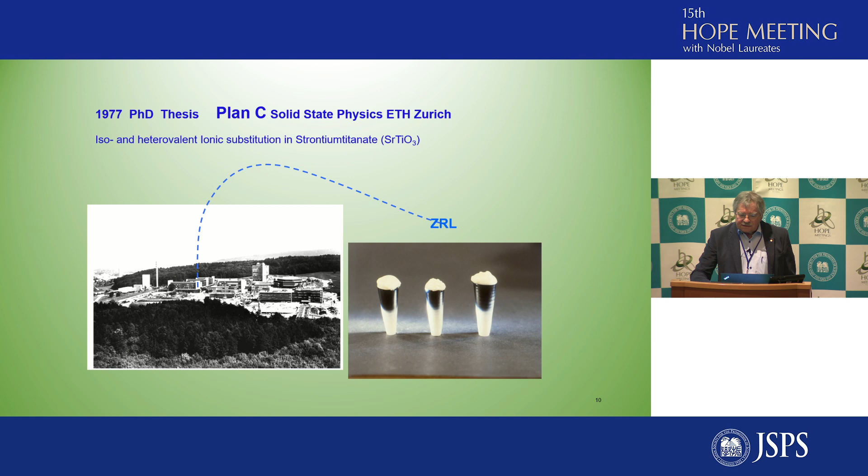Some colleague at the IBM lab, Gerd Binnig, was interested in superconductivity in some kind of organic compound. He had worked on it during his PhD thesis. And when he joined the Zurich lab, he had the idea: can we do some modification of the carrier density of the reduced strontium titanate? Can we do some niobium doping?

So I said, if nature allows so, we will do it and you will get some new crystals. So within 3 days, I was able to take a crystal and send it to Gerd Binnig, and he was very enthusiastic about the short time between his desire and the wish he got fulfilled.

So niobium-doped crystals were superconducting, at higher temperatures. So that was my first encounter with superconductivity.

With niobium doping, the transition temperature could be increased from 0.3 Kelvin to 1.2 Kelvin. That's 300%. Gerd was very enthusiastic about it and said if we could further increase the carrier density, would it go even higher, approaching room temperature? Well, we tried, but as was observed later on, also for the cuprates, increasing the carrier density led to a decrease in the TC and the vanishing of the superconductivity finally. So he lost his interest.

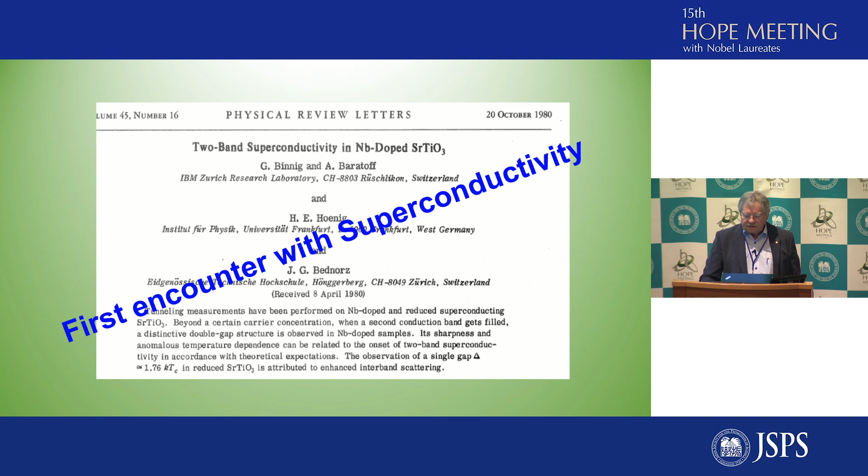I lost the chance to have a new project and continued my PhD, while Gerd, with his senior colleague Heini Rohrer, started to work on scanning tunneling microscopy. This was a good decision. They were able to get in touch with atoms and molecules as addressable individuals, and they were able to control and work with an accuracy down to the picometer size. And finally, this brought them the Nobel Prize for Physics in 1986.

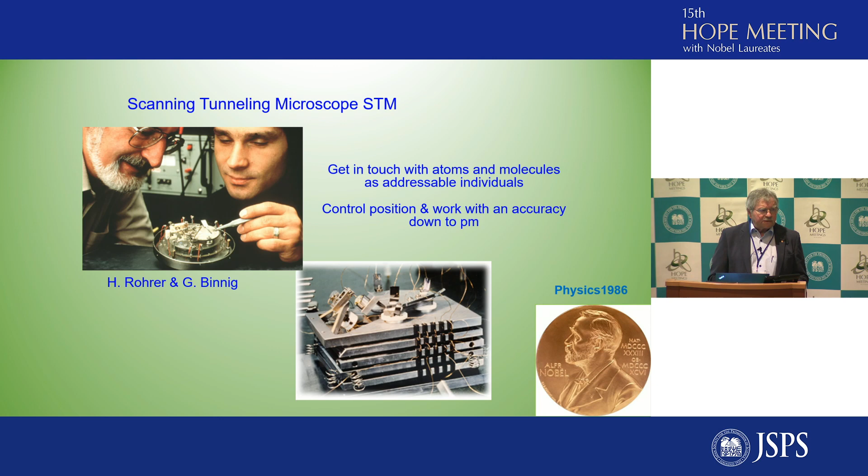So I was disappointed to have lost my partner for the superconductivity project, finished my PhD, and got the chance to join the IBM research laboratory in Zurich, or close to Zurich in Rüschlikon. It was then that Alex Müller took over the flag, because he was just returning from a sabbatical in the US, where he had been involved in experiments on superconducting aluminum. So he got interested in superconductivity, and back in Zurich, he began to give lectures about superconductivity at the university.

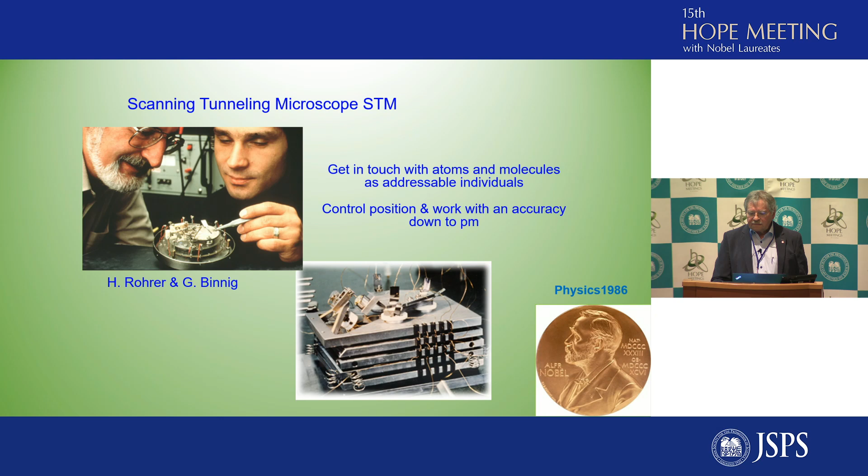I got the chance to work on a material science project, which got me involved in producing thin films of oxides by different deposition methods. While doing so, I was slowly driven by the management to combine this film growth process with STM, a scanning tunneling microscope, as an analytical tool in order to study the first steps of film formation, quasi in situ. This was an ambitious project. My time as a researcher was not always as relaxed as it's shown here, but I remember this time from these occasions even better than my professional career.

Parties were all the time important to get back to real life again, and compensate for a disaster, for instance.

But during that time, I really was not satisfied with the result of this research, because the approach came too early, at a stage where the scanning tunneling microscope was still experimental and not yet a real established analytical tool. So this excellent idea proved out to be not very successful, and I had to consider changing, even leaving the project.

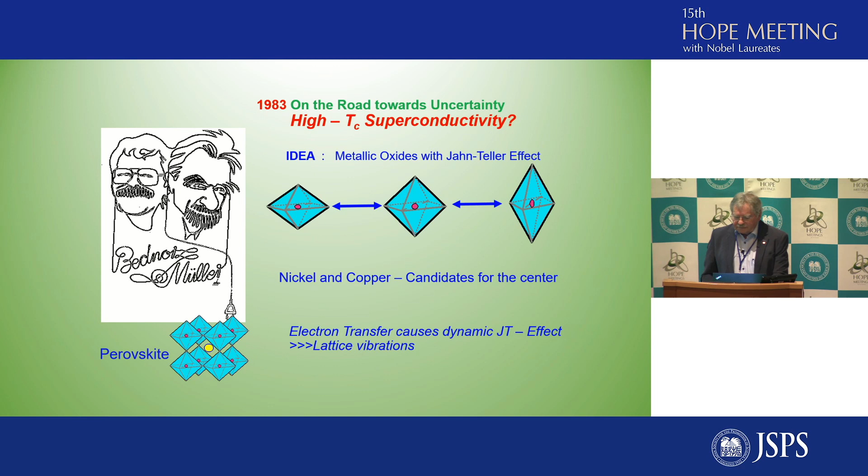So we embarked on the road towards uncertainty, because we didn't have any hint whether this would be realizable or not. Now let me go back in time, because I had to learn about superconductivity, about the topic, and start from the beginning.

That was a start into a new era when Kamerlingh-Onnes discovered superconductivity in mercury in 1911. He observed a sharp drop, a sudden drop around the condensation temperature of helium, namely close to 4.2 Kelvin. Resistance dropped to 0 — it's really 0.

Mercury showed ideal conductivity below this transition temperature, and the question was immediately, is current transport without loss possible? So, of course, it's possible, but it's not realizable at these low temperatures. Kamerlingh-Onnes discovered additional superconductors.

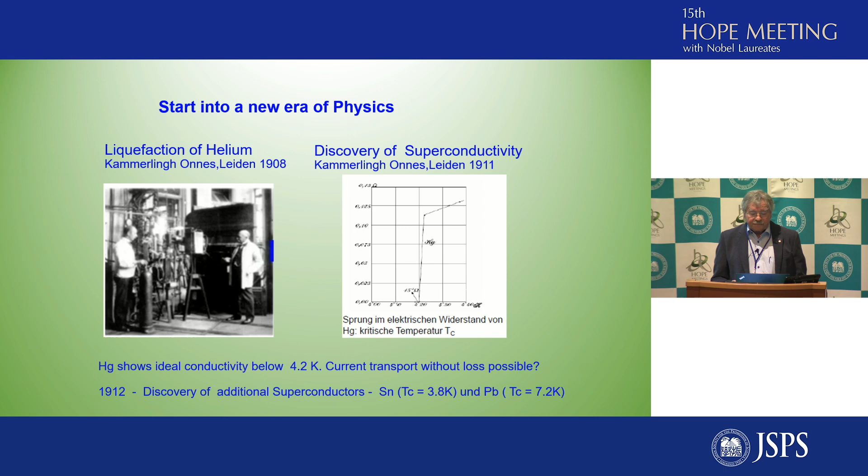There are a lot of experiments which we could think about if we use this superconducting state. He said the consequence of this zero resistance state is the permanent current. Once a superconducting ring is induced with a current by a magnetic field, and the magnetic field is removed, the current would circulate forever. So this would be a permanent magnet as well.

His first approach was to construct a very, very strong magnet, like 10 Tesla. This is more than a million times higher than the strength of the magnetic field of the Earth. But this failed drastically because the coil lost superconducting properties at very small current densities already, and at magnetic fields which were very, very low. So the experiment ended with a disappointment. It was terminated. The breakthrough, however, came only decades later, namely in 1961.

The second criterion to prove superconducting state is the Meissner effect, the effect that a magnetic field which at high temperatures is penetrating the conductor, and below the critical temperature, the magnetic field is expelled. But still, these were not usable properties.

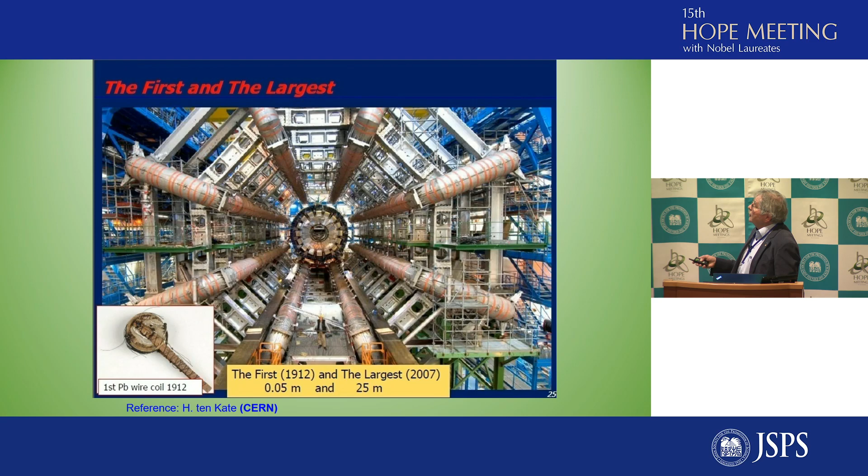So in the first and the largest magnets are shown here in one of the detectors. The first superconducting magnet which failed to show high magnetic fields, and the largest with a dimension of 25 meters are these superconducting coils for a detector in the LHC.

So let's start with our research. 3 years later, after our start, there were still no encouraging signs that we would ever end up with a superconducting oxide at a reasonably high temperature.

So what we did is we partially replaced ions in the center of the octahedra, sometimes in the center of the unit cell, and the corresponding results in resistivity as a function of temperature. We see here that was our host material, the material we started with, and then did some variations. We were replacing the A site, keeping the nickel site untouched. We were replacing the B site, changing the ratio nickel to copper on the B site.

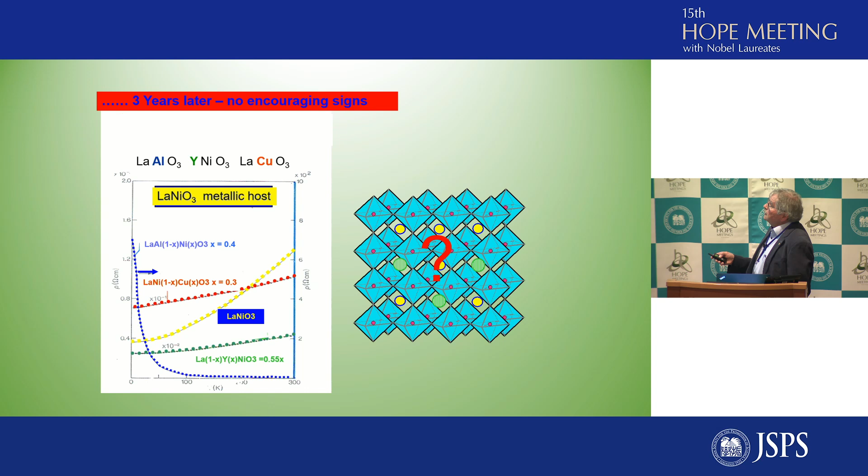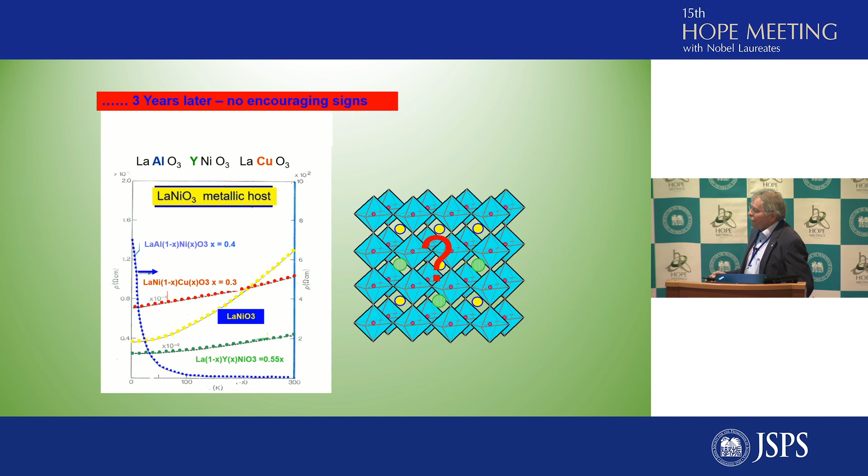But remarkably enough, the model of the Jahn-Teller effect left us only with 6 different atoms to combine, but still a lot of samples which needed to be investigated. So this was a work which was not very satisfying because there were every day measurements which ended with a disappointment. And this brings me to something which is very true for this activity which we had.

It's a quote, or 2 quotes, by Szent-Györgyi, the discoverer of vitamin C. He said, the discovery consists of looking at the same thing as everyone else and thinking differently.

He said a discovery is said to be an accident, and this is even more important, meeting a prepared mind. So having the dream of superconductivity in these oxides, I met a paper which met a prepared mind.

So this is a compound similar to the perovskite. This is A5B5O15. Here you have oxygen deficiency. But this research group was looking at this material because they were looking for catalysts. These were a group of chemists looking for catalysts.

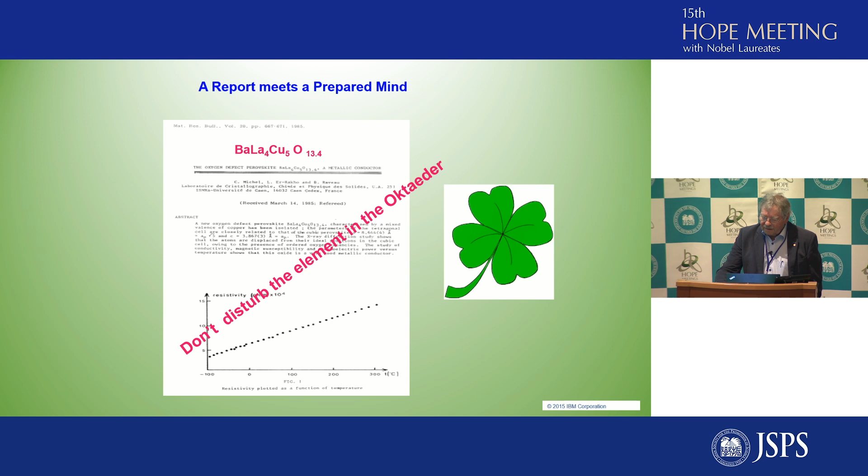So after 3 years, at the 75th anniversary of the discovery of superconductivity by Kamerlingh Onnes, we came up with a new record temperature in a completely new material. This was a rise in transition temperature from 23 Kelvin, which was the maximum in the intermetallic compounds, to 35 Kelvin, which is really the transition temperature.

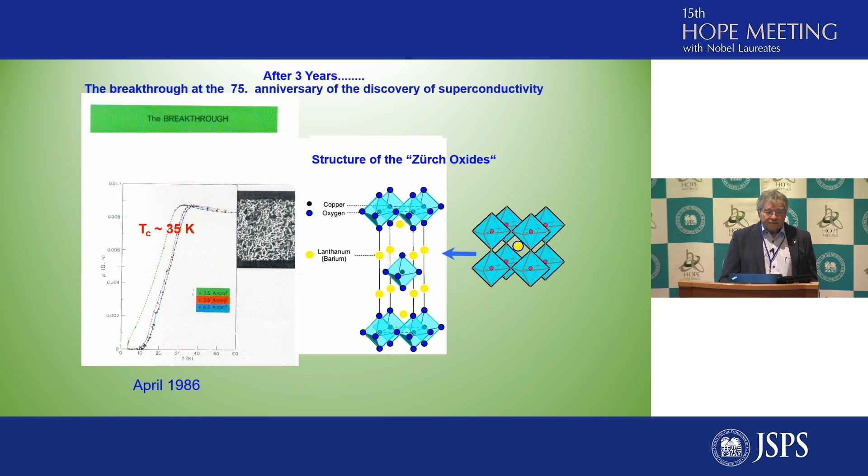Don't worry about the broad transition here, because the samples were ceramic samples and were polycrystalline with a lot of grain boundaries, and it came out later very clearly that grain boundaries can be a big obstacle for the transport of current across.

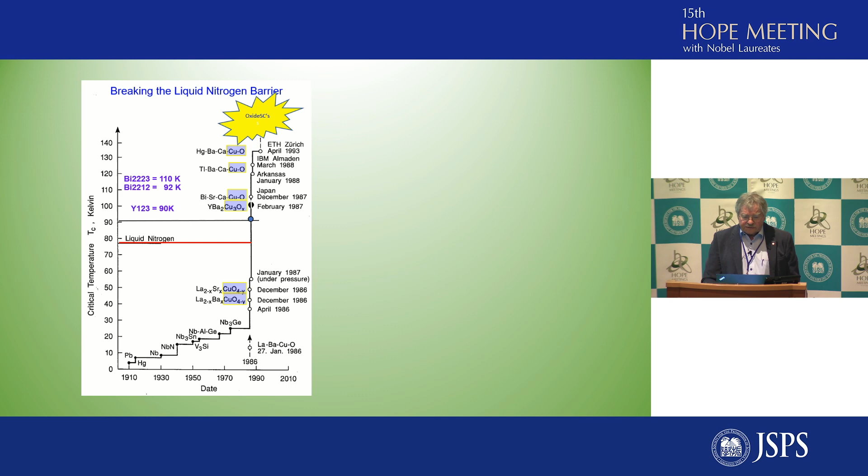So this sparked a lot of activities in 1987 when our data were published. This is our contribution to the first step in the transition temperatures. And with all the groups joining the activities, the temperature was rising very rapidly to more than 135 degrees Kelvin. But the remarkable thing about all of these new compounds is that they are all based on the same building block, the copper oxides, which have been discovered to be essential for the superconductivity. The copper polyhedra remain as a main building block, and only the cations on the A site are varied.

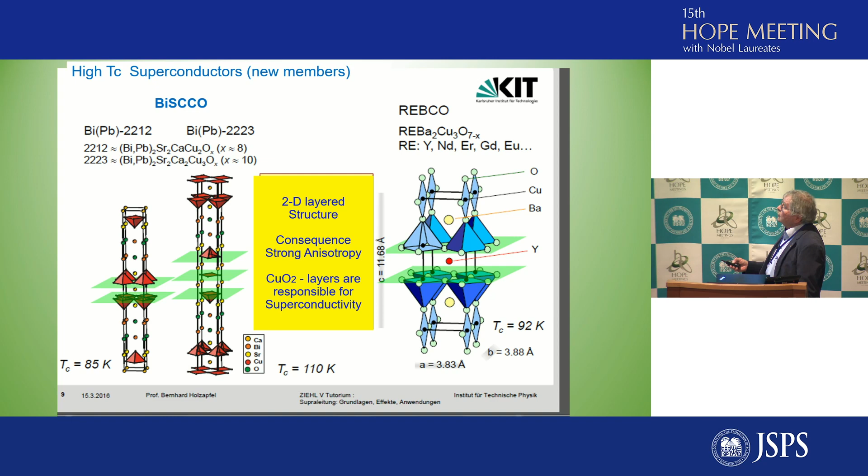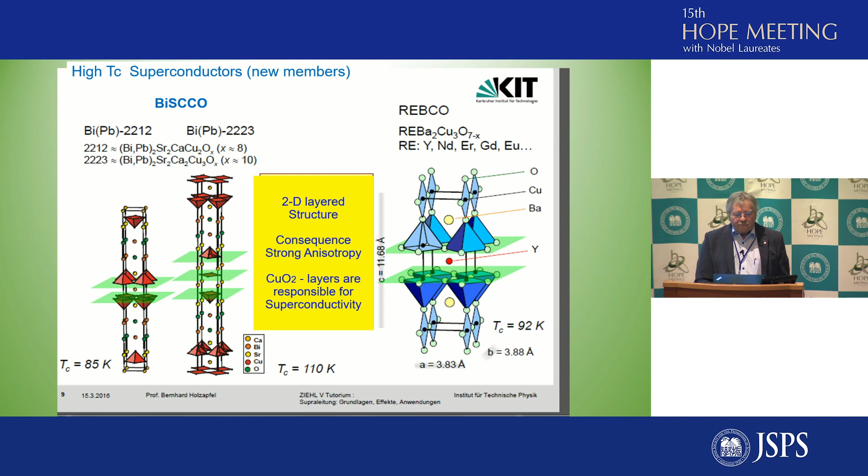So this is an example of the series of new materials, 2 groups: bismuth-based compounds with copper oxide, and yttrium or rare earth-based compounds. They are all 2-dimensional structures, layered structures, and this has a consequence for the physical properties because they show strong anisotropy.

But let's go to the properties of the high-temperature superconductors as compared to the old ones. We have the high temperature superconductors. They are really designed for a new technology. These are high performance materials, and they are used to substitute copper because of the high electrical current density. Here we have the example: it can be more than 200 times higher than the current capability of copper.

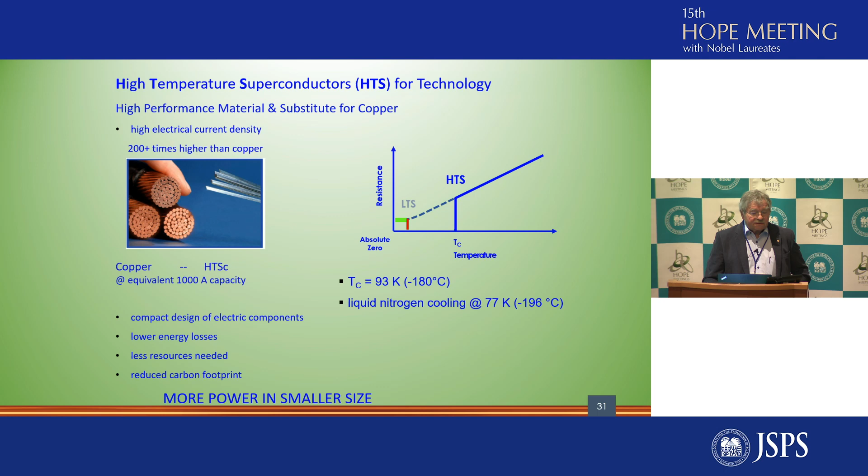This is a comparison between the amount of copper wires you need to transport 1,000 amps, and this is the ribbons of a superconducting composite, which has the same capacity. So what high-TC superconducting materials mean for the technology is you have more power in a smaller size. That means it's possible to have a compact design of electrical components, lower energy losses if you think of transporting energy from A to B. You need less resources, and you reduce the carbon footprint by this.

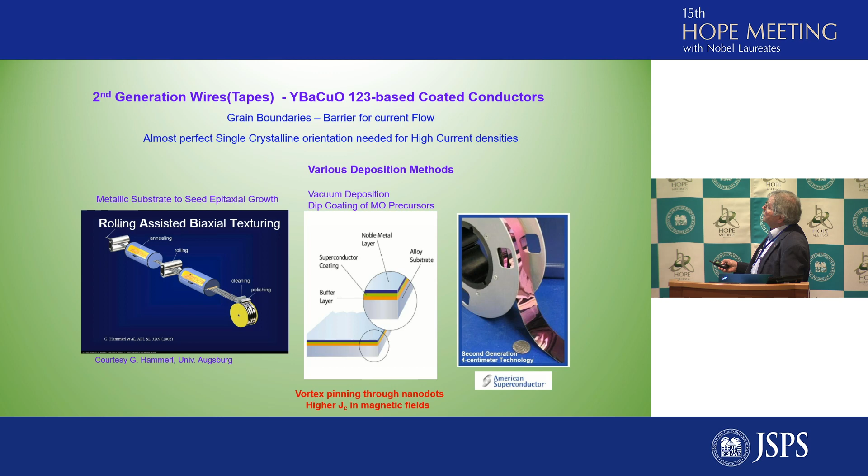So it was necessary to transform these superconductors into the form of wires or tapes. The most advanced technology is made nowadays with the 1-2-3 yttrium barium copper oxide based coated conductors. What's needed is a support material that's mostly a metallic band. You have vacuum deposition methods which you apply to have multi-layered structures on top of these metallic substrate. And what you would like to have at the end is a flexible material, a flexible composite, in order to be able to make coils and wires.

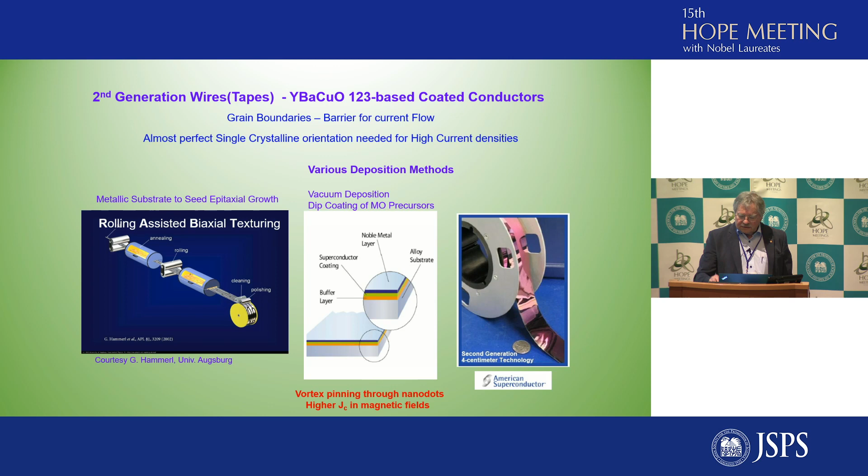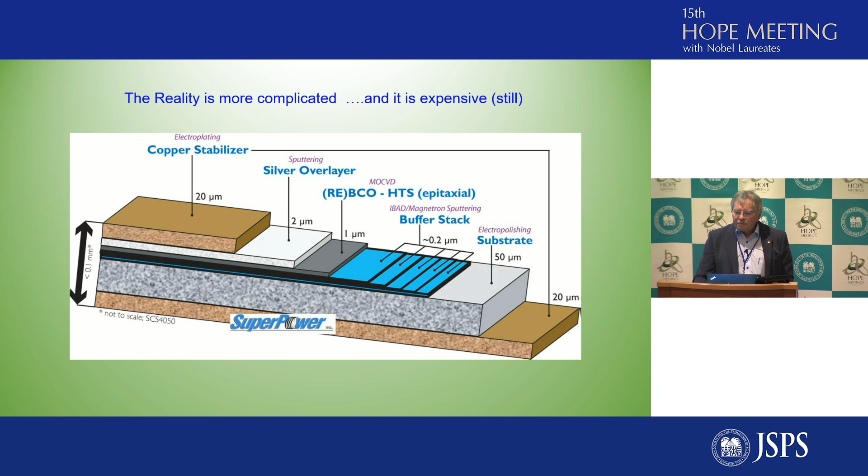Here we have 1 micron, but you can design your cables or your tapes with a varying thickness of the superconducting layer. But 1 micron is already able to have several hundred amps passing through this composite. So the total combination of all these layers is on the order of 0.1 millimeter. So you have still a lot of flexibility in this composite material. This makes the high temperature superconducting wires very interesting for application in all areas of a modern energy infrastructure.

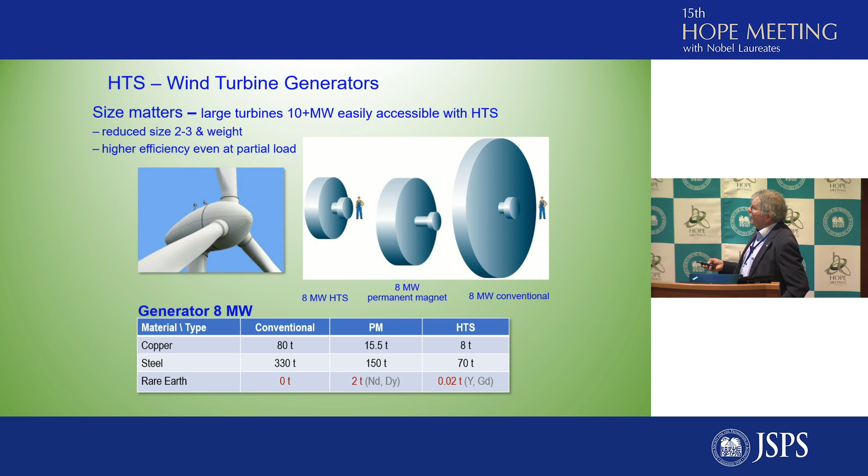And the rare earth consumption for the permanent magnet is 2 tons of dysprosium or neodymium, which is a cost factor and a factor of supply. And here it's only 20 kilograms.

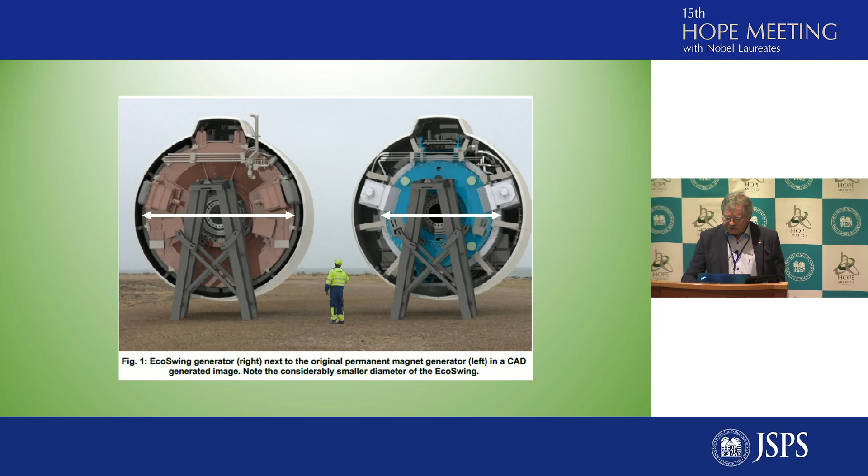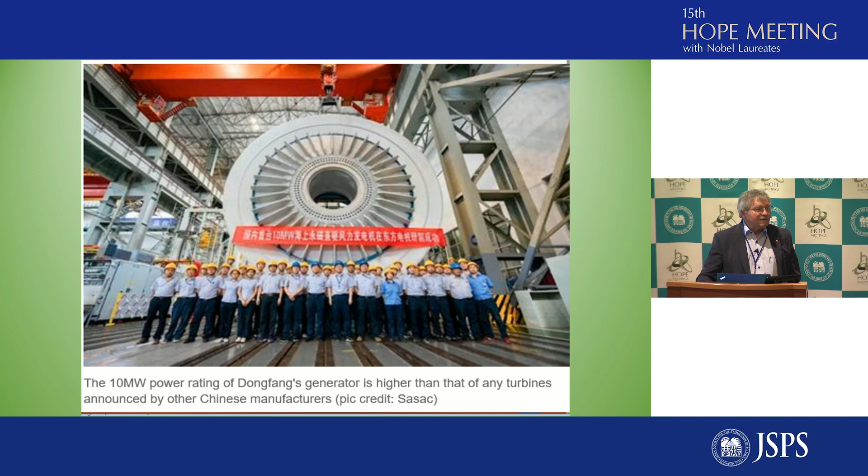So one of the first experiments and prototypes which have been installed was in Denmark in 2018. That was the first design and test of the first wind generator. Here we have an example of that. And to compare the dimensions of the classical generator, it's a 3.5 megawatt generator, and the comparison with the superconducting generator. If you compare the 10 megawatt classical generator, which we have as an example from China, it's not easy to transport anywhere. So it probably will stay there in the factory.

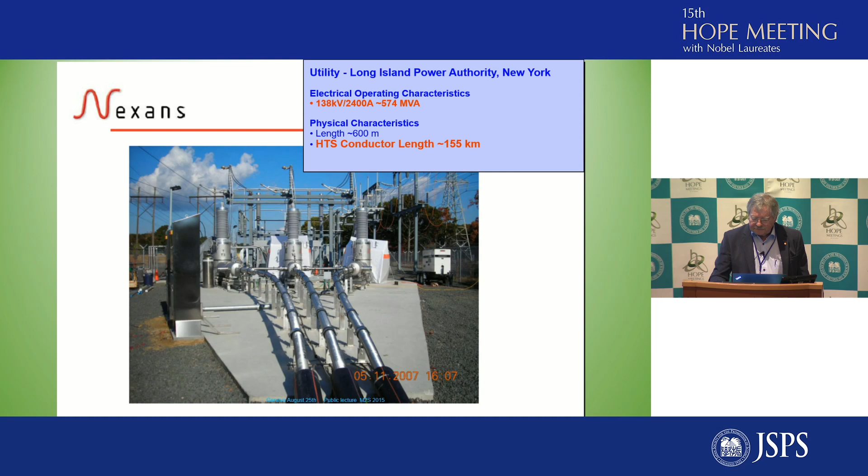Now, for further distribution in power transmission, there is a paradigm change from the use of high voltage to the use of high currents, which are able to be passed through a superconductor. You have a higher transport capacity at lower voltage. So this is very interesting for retrofit in urban areas, because you need fewer cables as compared to the classical ones. The distribution at medium voltage means you avoid expensive high voltage installations and, for instance, transformers in city centers.

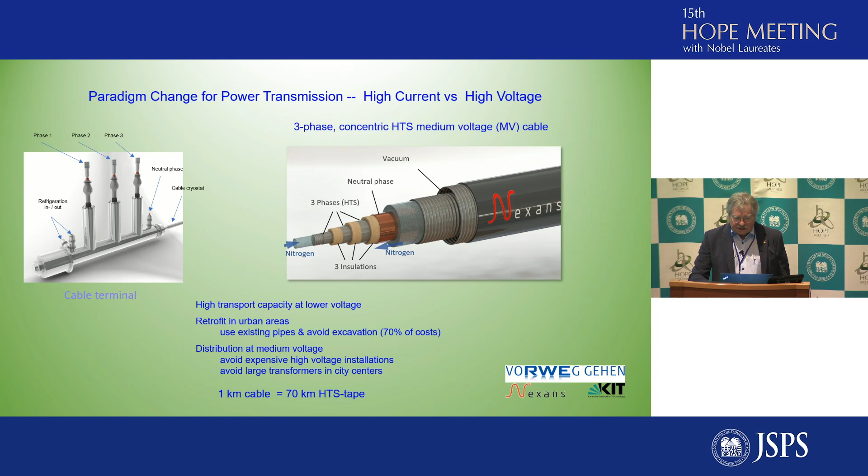So the critical point is that in such a case, for 1 kilometer cable, which is existing in the inner city of a city in Germany, for 1 kilometer cable you need 70 kilometers of wire.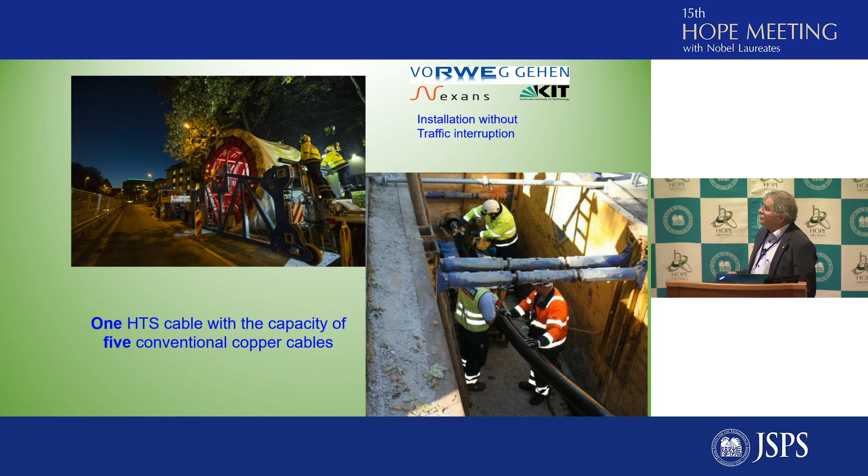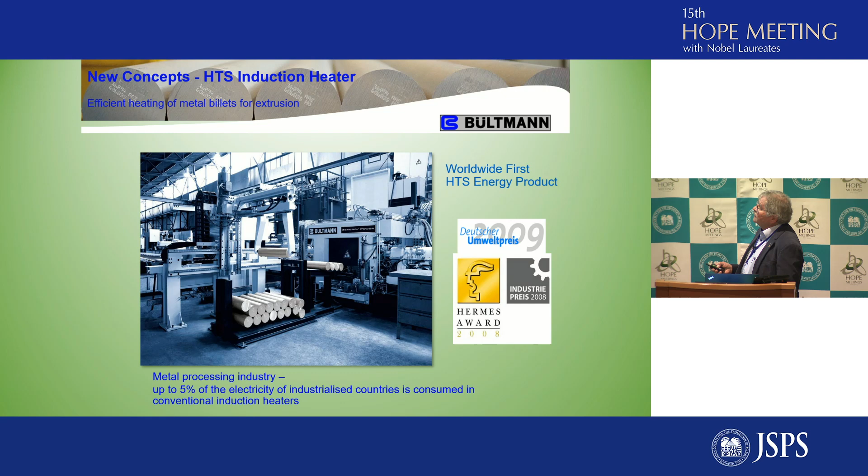I'm coming to the end soon. One amazing concept has been applied which is used in the metal industry. The metal processing industry is very energy hungry, and one of the processes which is using a lot of energy is to heat such billets, such cylinders of copper or aluminum, prior to extrusion, prior to the fabrication of profiles. And this is done with superconducting magnets.

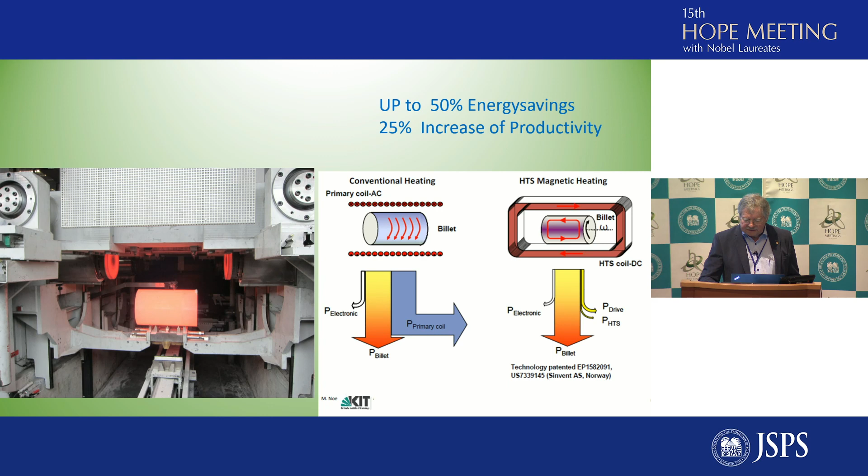This is a conventional heater, uses a lot of energy, goes from the primary coil. Only part of the energy is going to the billet. Here we see this billet being heated up to 600, 700 degrees centigrade, very, very rapid. And here is the magnet heater, which is saving up to 50% of energy. And another advantage is that the productivity is increased because the homogeneity of the heat distribution in the cylinder allows for higher pulling velocity.

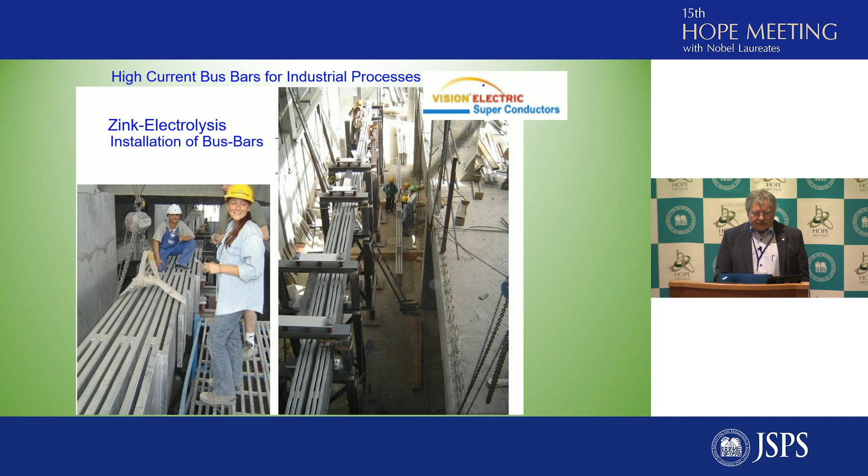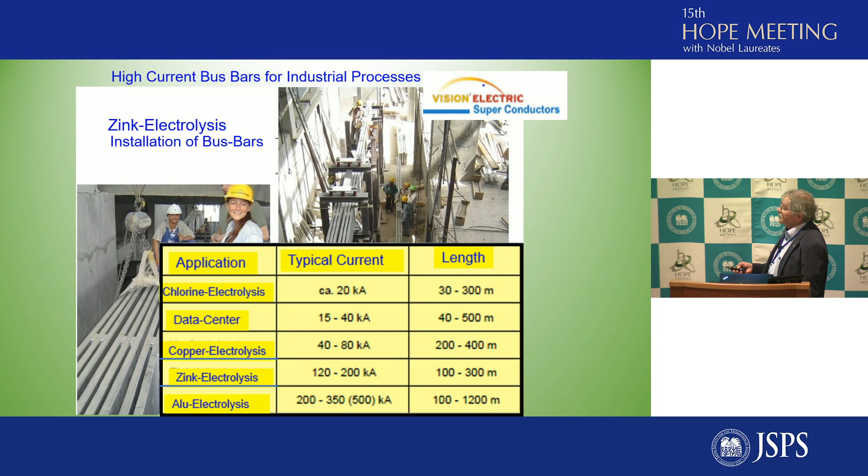High current bus bars, usually used in industry to supply currents up to 500 kiloamps, 500,000 amps, are used for zinc electrolysis, for chlorine electrolysis, and also aluminum electrolysis. This is an example of a superconducting bus bar. Here we have the 20 kiloamps conventional connection. Here you have the transition to liquid nitrogen temperature, the cryostat, and here the cryostat is the line for the superconductor, including the cooling system.

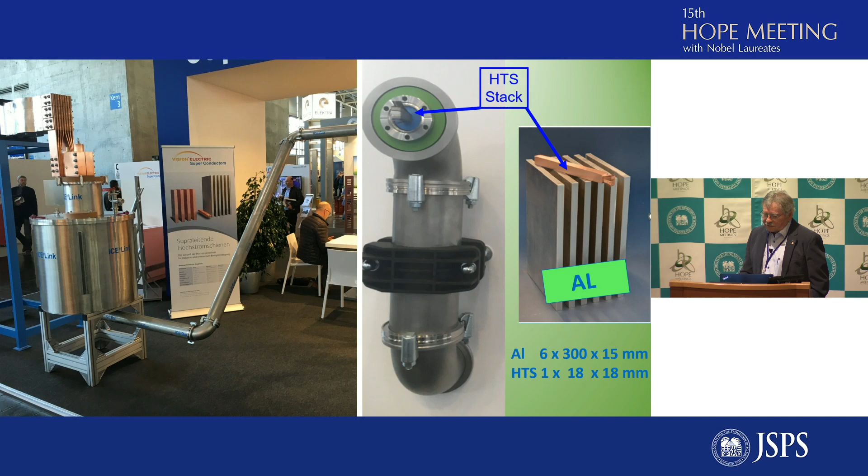And if you see the enlargement here, this is a whole tube with a cooling system, the insulator and the liquid nitrogen supply. And this part is a superconducting stack. Here you have again the comparison between the aluminum bars and the superconductor being able to carry the same amount of current.

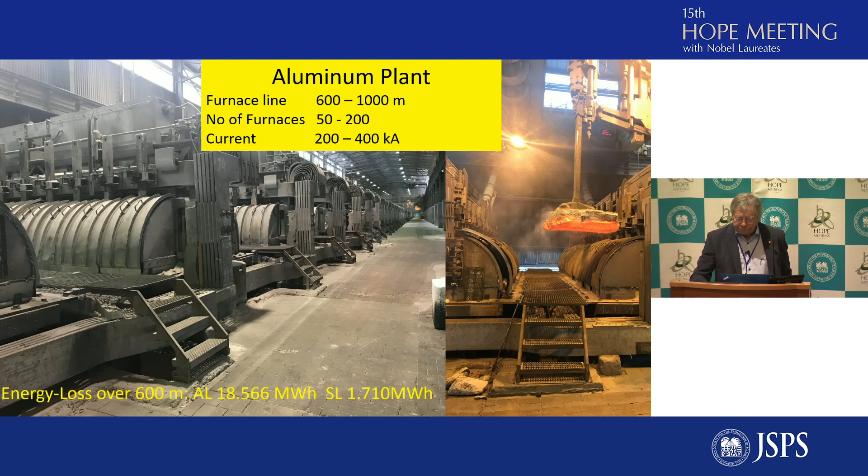So I think in a few years from now, we will at least have the possibility from Tokyo to Nagoya to use the superconducting high-speed train when we would like to go to Kyoto. I was told last year when I was here that the line is already under construction, and that somewhere in between, in a special prefecture, the governor has some objections for the line to cross his country. So there have to be, I guess, some severe discussions in order to make this project possible.